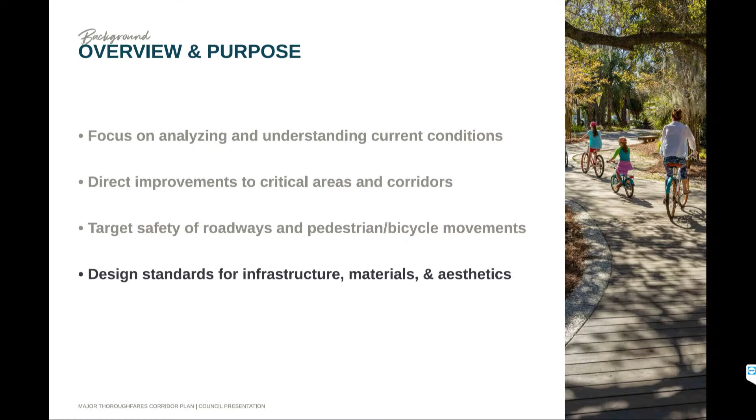We have started and ended all of this looking through the lens of safety. Serious injury and even fatalities happen within our public domain, and we need developed standards for infrastructure, materials, and aesthetics, and that is not to bake in monotony. It is actually meant to, from a technical standpoint, have a common understanding of state-of-the-art infrastructure and materials and geometries so that we can express the individuality of areas across the corridor over time.

This is a lot of public right-of-way and linear feet of trail and street. So I'll describe this in general terms as we get into this and understand exactly the confines of it. Again, we spoke to systems before. That's the technical aspects of what we apply to the corridors itself. Landscape and aesthetics, signage, branding, public art, roadways, intersections. Those are both cross intersections, slip lanes, and also roundabouts. Pathways for both pedestrians and bicyclists. And then transit. That transit will help us in a number of issues that we face as an island.

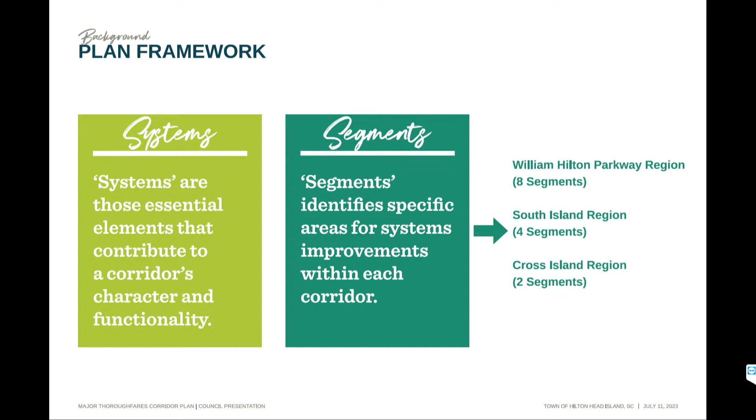Then to the segments, again, applying those systems to those segments. There are 8 different segments or reaches of the parkway itself. We've broken it down into geographic areas based largely on the feel of the corridors, the geometry of the corridors, the adjacent land use, the neighborhoods that are adjacent. The South Island region, there are 4 segments there as well. That includes Palmetto Bay, Sea Pines Circle, and Pope Avenue, and portions of Forest Beaches. And then the Cross Island region.

And then lastly, the implementation. To Sean's point, this is a very complex issue that leads to capital improvements. How do we take that down over time? What are the priorities? Where's the funding come from? How do we craft that in a capital improvement budget? All 3 of these sections, they're not chapters, they're sections, lead to this comprehensive document.

Again, as Sean had mentioned, we've got these wonderful, bright, world-class practitioners assisting us here. We've looked at the plans that you've done before. We've looked at national standards. We've looked at Smart Growth America and Vision Zero as guidance as well. We don't have the corner on the market on all the good ideas. There's a lot of good ideas out there, and we're taking advantage of them as possible. So we're learning from what others have done and what we've done on this island in the past.

As I mentioned, this is a lot of roadway and a lot of folks using it on a daily basis. We know there's a lot of people that inflow into our community on a daily basis, and less than half of that outflow. We've got 72 miles of public pathways. We've been at the forefront of a trail system nationally in years past. We need to augment that and get back to that point. And then the trolley, not to be discounted. We've done a lot with our trolley system, and our transit system does a lot of public good for not much resources and organization. They've done tremendous work. We think that's a diamond in the rough that can help in a lot of issues.

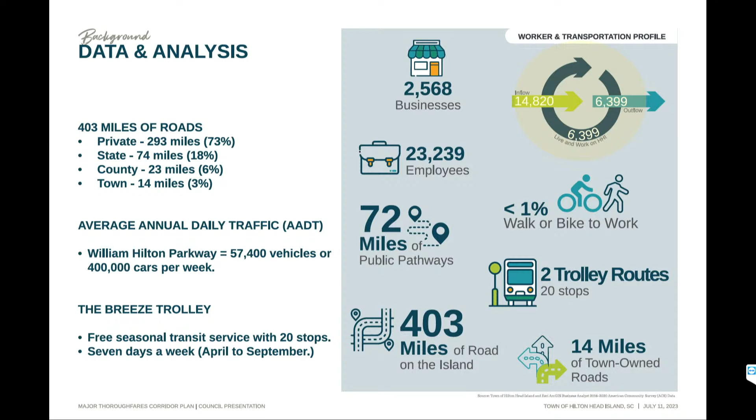Stakeholder involvement, the plan developments, neighborhood representatives, transit, public safety, utility folks, retail, and the major landowners have all been consulted and asked for their feelings and opinions. Quite frankly, they align with our intuition as we've approached this. We need to increase safety. We need to update the pathway system, fill in the blanks as it were, and improve the standards, functionality of intersections, create a consistent aesthetic that is not a monotonous aesthetic, that is a consistent quality of aesthetic that may be expressed differently, segment to segment, place to place. Develop a uniform signage and wayfinding system.

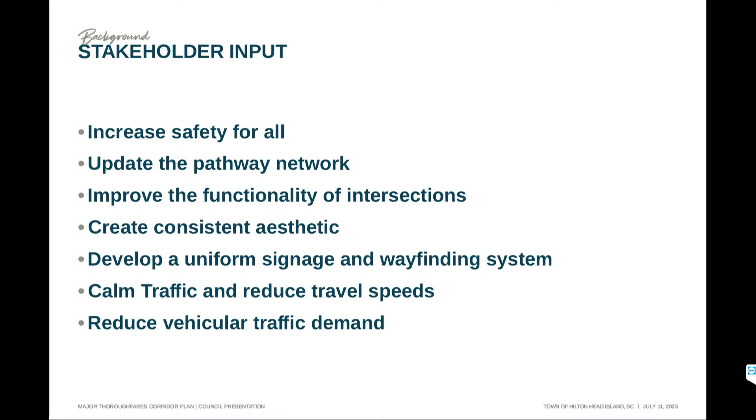So a highlight of the systems that you have seen before. Again, it's landscape, roadway, intersections, signage, transit, and pathways. That was probably too quick for you all, but in the compendium document, you'll see a lot of detail to all of that, where we're establishing minimum standards, directives as to what goes where, to be used as future design takes place into engineering and into capital improvements.

And Brian, if I can point out, we delivered council a presentation that had a little bit more detail to remind them of the system discussions that we had in March. For the purpose of this meeting, trying to advance into the segments and then recommendations, we condensed that down. So the presentation that you had previously provides more context on this. Happy to answer anybody's detailed questions about any of that today or latter parts. Don't mean to skate over that.

Okay, if we have questions as we go along, or how do you want to? Yeah, I think since it's so intensive, asking some of the questions as we get those certain highlights is appropriate. Mostly a comment or a question, and that is at the March 3 presentation, we had a document of about 113 pages, which included this part that you're summarizing now, systems. And now we have a document about 220 pages. My understanding is that we are to consider all of that together, totaling about 333 pages. So we don't set aside what you showed us before on systems. Remember that to the extent that we can.

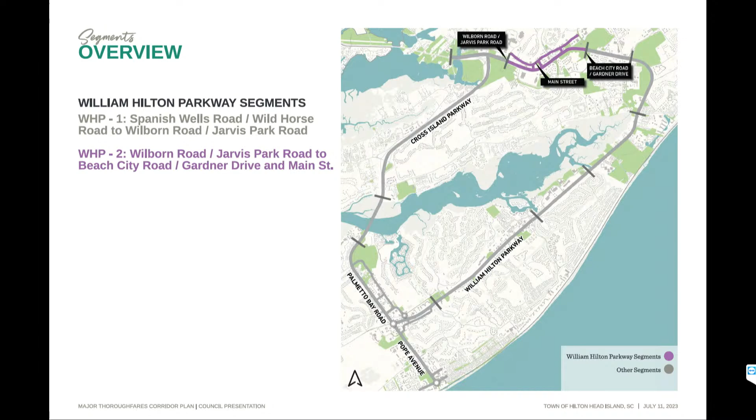Point well taken. Now to the segments. Again, these are the geographic reaches or breakdown of the larger geography, which is what I think is the backbone of our roadway skeleton. William Hilton Parkway, segment 1 is from Spanish Wells to Jarvis Park. Segment 2 is Wilborn to Beach City Road, including Main Street. 3 is Beach City Road to Dillon, essentially.

4 is through the Mid-Island, Dillon Road to Folly Field. 5 is Matthews, Folly Field down to Shelter Cove Lane. 6, the straightaway as I call it, the Shelter Cove Lane down to King Neptune. The second straightaway is King Neptune down to Shipyard and to Wexford. And then it's into the Wexford Drive to Sea Pines Circle. So we've broken that down into these geographic areas just largely to understand it. Each of the conditions within each of these geographies can vary for sure.

Right, right. If I could, you list these 1 through 6 or 7 here. Is that the priority you're giving them, or is that just geographic north to south? No, sir. It's not a priority at all. That's right, Councilman. It's a way of taking something large and breaking it down in incremental pieces so we can understand it intimately. A couple of those are in fact priority areas, just based on that previously shown heat map of the accidents and the fatalities. We need to address those safety issues as a first priority.

Thank you. One other comment, can you go back to that previous slide where you're showing the segments? I think it'd be helpful, and just a quick suggestion, to put numbers by those sections on the map. It helps to locate them when you're looking at them. I did it myself. Yes, ma'am. Duly noted. Thank you.

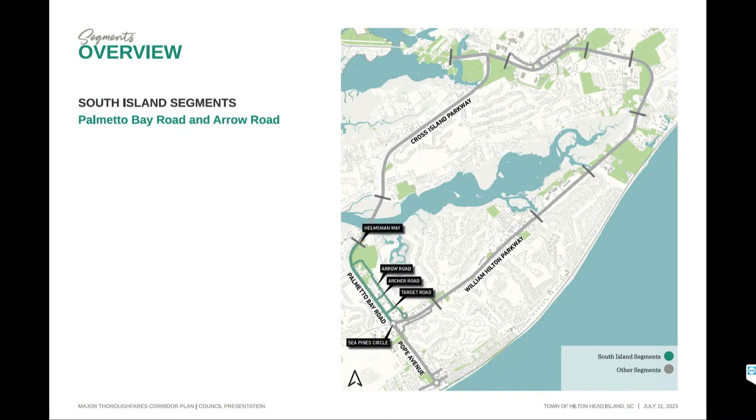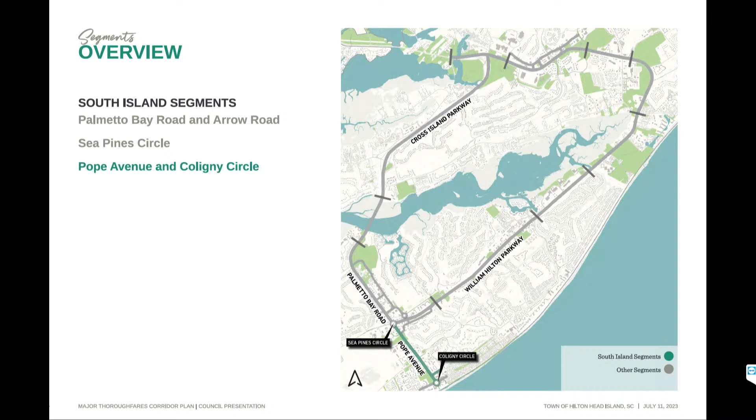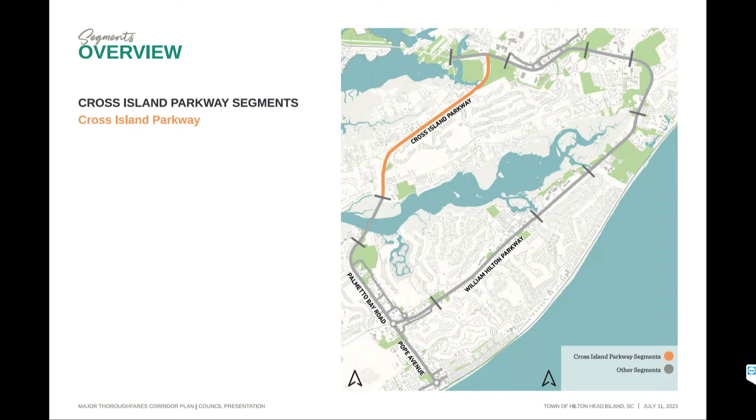Then the Cross Island Parkway. As we know, the toll booths have recently come down, and a repaved, modestly renovated corridor has been put in place. I think it looks marvelous. It performs very well. We need some bicycle and pedestrian access. So that is from the base of the bridge out to the 278, the Parkway. It also includes the Fraser Bridge itself and the approaches. As we know, there's some folks who use that bridge for pedestrian and bicycle activity.

So the prioritization of that, again, safety, connectivity. We've got to make sure that all modes of traffic can get to all places through this backbone, which leads to the skeleton of the public domain of the island. And then placemaking. Not all corridors are the same. Not all parts of the island are the same. We're always giving deference to the natural environment of the island, not just to protect it, but in fact, in many places to restore it and to enhance it, because it has been damaged and it is under stress, like any other natural environment that receives heat.

So the safety, go to those high crash areas and deal with them. New controls and configurations at intersections to make them safer. Access management, which means reducing those left turn motions out onto arterials. Turn lane improvements, improvements of unsignalized mid-block crossings, pedestrian crossings, and reduction of those conflict points. Connectivity is fill the gaps in the pathway. As wonderful as our pathway system is, it doesn't connect every place to every place. So we do need to fill in the blanks, as it were.

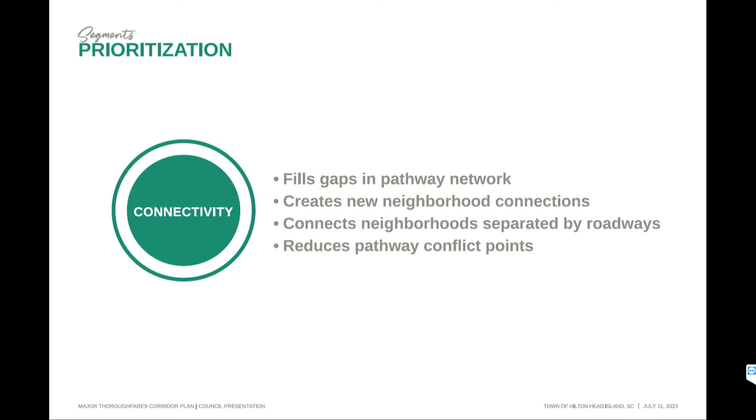We need to create new neighborhood connections, not just to the planned developments, but to the neighborhoods that are part of town, town jurisdiction. Connections to neighborhoods that are separated by roadways. How do we make those crossings safe so I can get from one side of my neighborhood to the other side of my neighborhood through safe means, and reduce those pathway conflicts. Placemaking, again, is always to improve the island character. Hilton Head Island is a very, very special place, culturally, historically, environmentally. How do we improve and advance that?

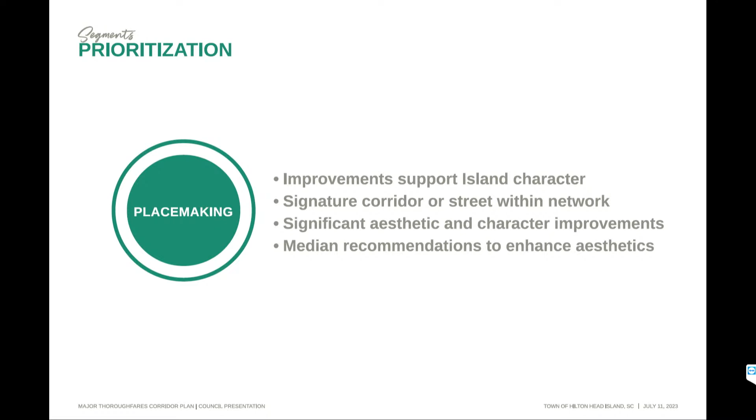So the prioritization, Councilman Stanford, to your point, we have prioritized the Parkway into 3 significant segments that need some improvements as a priority in our opinions. Palmetto Bay Road and Arrow, Sea Pines Circle, to be sure, and then Pope Avenue. Especially this time of year, as you know, Pope Avenue is a very busy corridor.

Sorry, can we go back to that slide and stop there for a moment for questions? So this is prioritization that the team has developed, and it might be helpful to revisit this after the council looks at all these segment improvements, because I have a few notes and questions about that prioritization, but I think it might be more helpful to talk about those as we go through. Yes, ma'am. This is all first blush, our recommendations, sans your input. We look forward to having your input again today.

And Brian, if you don't mind, I'm going to jump in for a second. The term priority segments here is probably not accurate. These are segments that council asked us to study in detail, and to make sure that we brought these forward for discussion. It's up to town council ultimately to tell us what the priority segments are. But we've evaluated these in detail and have recommendations that we'll cover here shortly. Some are recommendations that are sort of a single treatment application of the systems, and then some have options that we would ask for some input on. But yeah, I want to make that clarification. These are first areas asked to really take a deep dive into, and that's what we've done.

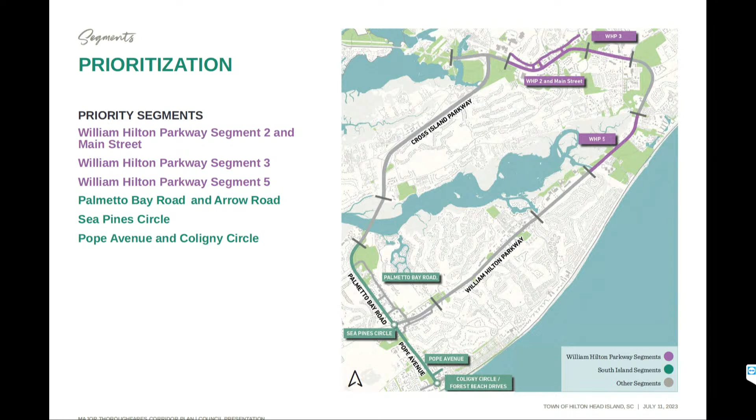Can I just add one thing about prioritization before we jump away from that slide? We did do a ranking system of all of the improvements made. And in the larger document, you'll have that in there as a reference. And these are the segments that had the most benefit with the implementations. So that is how these 6 or so were developed. Not my personal.

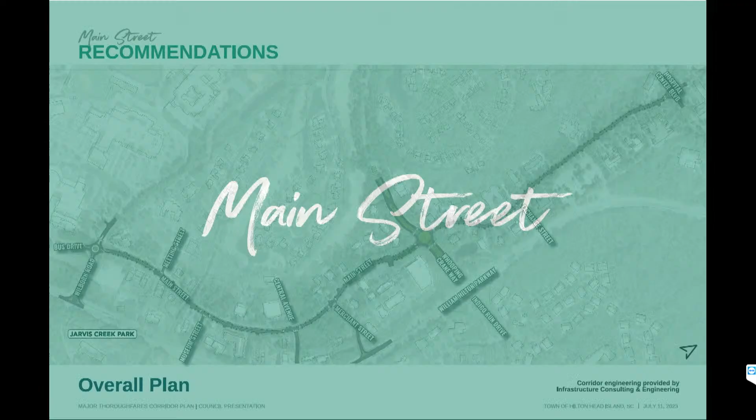Main Street is part and parcel of this. And design is happening on this Main Street portion itself, public and private. We'll go through some segments there. Again, we've broken this down into incremental pieces and show cross sections of what that would look like. Providing intentional pathways on both sides of the street, a pedestrian buffer from the vehicular way, putting bike lanes on the street itself. We've got a video we're about to show you that expresses this in 3 dimensions. I personally don't read sections well, but 3-dimensional images I do. This in many cases requires some easement to be taken outside of the right-of-way.

Next segment going to Whooping Crane is a wider concrete sidewalk and lives again partially within, and bicyclists largely on the street, or dare I say the commercial area of Main Street. So more sidewalk, more multi-use of the sidewalk is important.

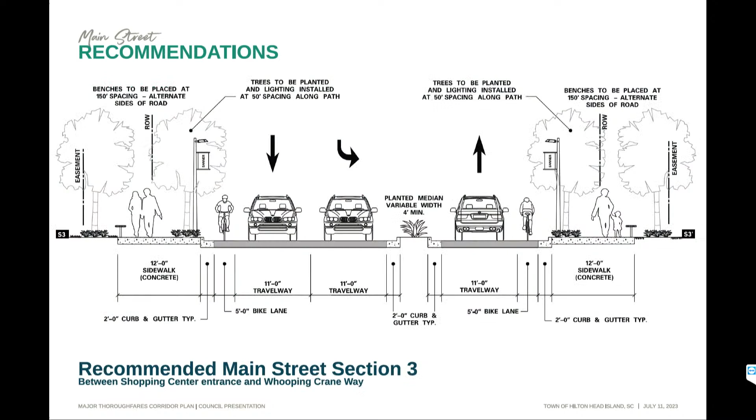Moving to the south of Whooping Crane, another section showing the modest median planted, 2 lanes of traffic in one direction, bicyclists, and again, sidewalk. Circle itself, we're recommending we place a circle at Wilborn and Main Street. That is a disjointed intersection, as many of us know that go through that, but that continuous movement that a roundabout would provide us is going to help a lot with that efficiency. Solve some of the offset geometry of the roadway system, which is a conflict point right now.

Brian, I don't understand the recommendation of 8-foot pathway and at the same time a recommendation of 12-foot pathway. What's being recommended? Joan, can you address that? So where the 12-foot is recommended, that's in the slightly denser adjacent commercial district. So the thought is that would provide a little more flexibility for on-sidewalk events or things to happen in there. And then essentially it's an 8-foot clear pathway. And in this case, we have trees and plantings that happen on a regular spacing that interrupt that 12-foot zone. Separate spaces along the road, it'll be different widths. Yep. All right, thank you.

In comparison, the existing fairly new sidewalk along Pope Avenue, what's the width of that? Down by Low Country Celebration Park. Pope Avenue? It's between 10 and 12 feet. I'm not sure exactly which one you're talking about, but it's wider, 10 or 12 feet. Right in front of Low Country Celebration. Yeah, it's probably closer to 12 feet in that section. And it's wide across the street, in front of the Marriott, I think that might be. On the other side. Yeah, that helps, the visual of that where we have existing. We have a lot of different widths on our pathways. Okay.

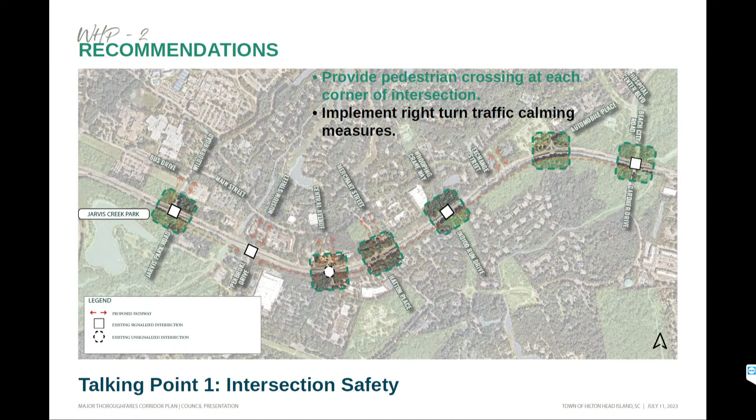Yeah, I think as they walk through each one of those slides, talking point 1, intersection safety, they talked about having the 4 corners, that consistent treatment with crosswalks. Talking point 2 about pathways and crossings, to have that consistent treatment, to add the missing segments of pathways that exist in that segment, and then mid-block crossings, talk about removing mid-block crossings, and we'll talk about some other spots where a different treatment for signalized mid-block crossings might be appropriate. So I think that was what we're trying to cover at a high level, to say, here's what are the recommendations within that segment.

So the four corner treatment, where it's all the same, that goes back to the systems of what it looked like. So I got that. But where you're taking out or adding mid-block crossings, I think it's important to point those out in each of these segments. So looking at WHP 2, where is the mid-block crossing being eliminated? Councilwoman, it's on the slide here. That's the mid-block crossing at Central Avenue. Thank you. At Central Avenue?

Just make a comment and maybe a suggestion. This is the first time we're seeing this and able to hear the explanation of what it is we're seeing. Mayor, you made a suggestion about our notes that we submit back. I think it's important for us to listen carefully, take it all in, but there's obviously homework to do, to combine the two reports, to come up with more points. Right now, they're gut reactions.

And I think to be more specific and helpful along the line for our next meeting, we take what we gather today, do our homework, and send notes, have another meeting, so that it can be far more specific as to each one of the elements. And I don't know if that makes sense to anyone. That's what I plan to do.

That makes complete sense. And this is a major document undertaking that requires not only a lot of conversation amongst ourselves and the community, but with our other partners, with the PSDs, to make certain that it's meeting the needs. And there's a lot of understanding that still needs to take place. So definitely we need to take our notes and submit them. Alex, I know you had a comment. That's okay. I'm making a note and I will send it in.

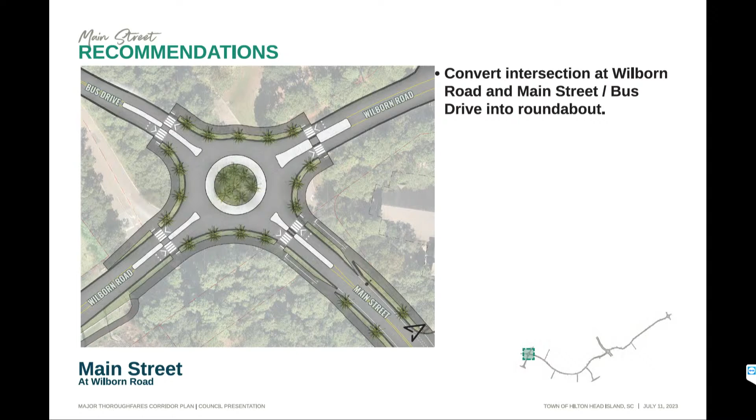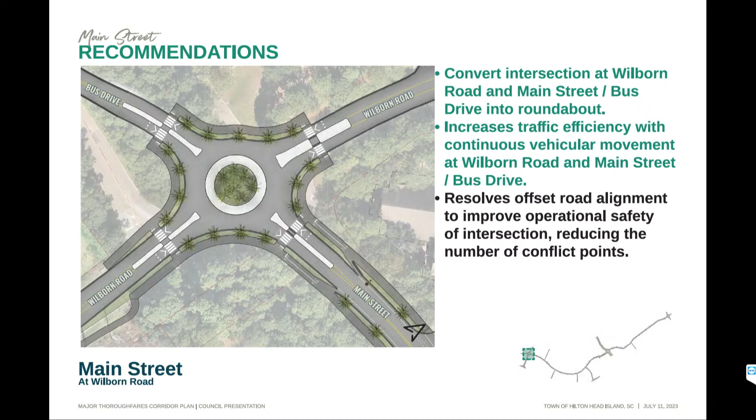Again, medians have been planted. We've allowed for more pedestrian and bicycle areas, converting this intersection into a roundabout, again, to increase that traffic efficiency and resolve what has been pretty troublesome offset geometry. I know staff has struggled with this intersection for years from a traffic movement standpoint. So this roundabout satisfies a lot of issues, that roadway geometry and minimizing those conflict points.

So these are applying the streetscape standards, various intersections, crosswalks, and queuing spaces on the walkways leading to those crosswalks. So the same standards we're using elsewhere are being applied here. Whooping Crane traffic circle, providing for pedestrian crossing at the four legs. Same with this roundabout at Hospital Center.

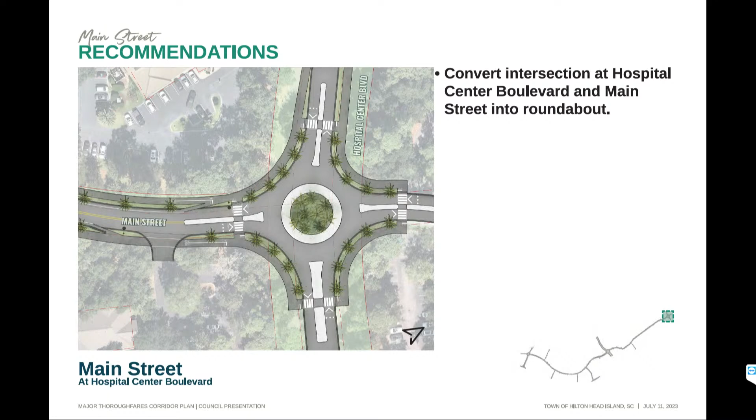Tony, or Kim, I'll ask you to maybe get up that video if you would, please. Just 4.5 minutes long, but it's traveling westbound toward Wilborn.

Volume. Is there supposed to be volume? There is no volume. Okay. No, no elevator music. Mhm. It is intentionally sped up for the nature of the viewing. Sure it is, Tony. Sure it is.

So there's the proposed condition laid over the existing roadway. 11-foot travel lanes, bike lanes on the street, 5-foot wide bike lanes, and buffer, landscape buffer, and then path.

I hear music. Thank you. I thought it was just me. I think that's someone's cell phone that's adding music.

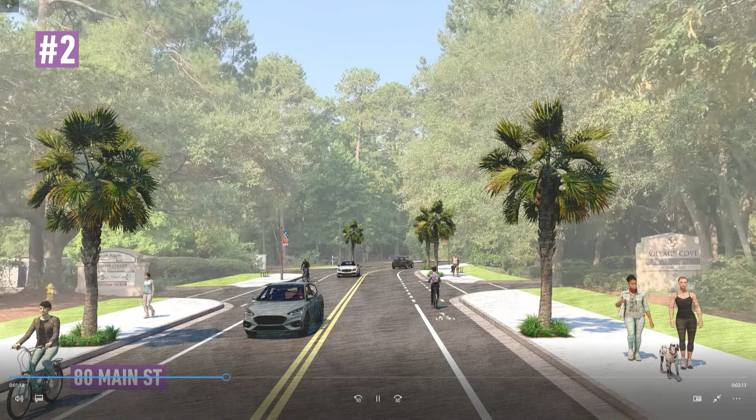So, Councilor Stanford, you can see here where we've got that widened pathway, but we've got the planters that are curbside. Those again, as final design happens, may be increased or diminished, but it gives you a sense of the pedestrian environment. No medians in this section.

Does this require acquisition of more right of way? In some places, it'll require acquisition of at least easements. Taking the median in some of these instances and putting it into the pedestrian environment causes us to push out. This is at Whooping Crane Circle. In some places, you'll see we've pushed in, so the median has gotten diminished or removed in places to accommodate sidewalks on the outside, so that we are impacting those adjacent properties less by sacrificing some of that median space.

I'm hoping those trees, though we haven't worked from a survey, haven't worked on this to that degree, can be identified and we can adjust as need be to save significant trees. Could be any number of things. And that planter may be something that's elongated. That could even be a tree lawn, not just a planter.

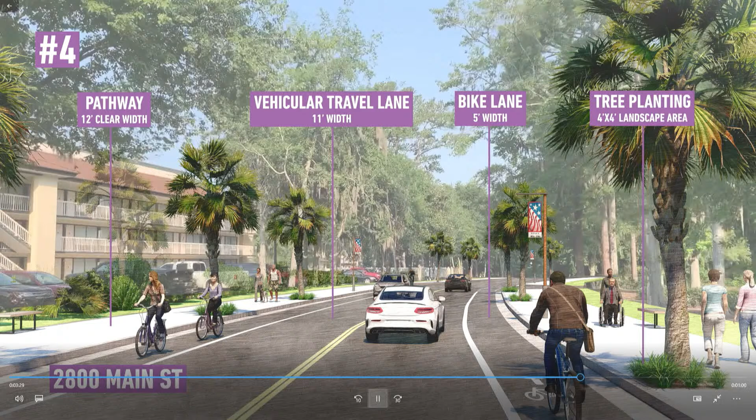I think as I understand it, from looking at a lot of bike lanes in a lot of different locations, is that there's two kinds of cyclists, if you will, those who would be on the pathways that are recreational cyclists, and those who are probably going in a bike lane because they're traveling to and from home or to and from work, and I have seen a lot of people try to ride their bike along this road, including me, to get from one place to another.

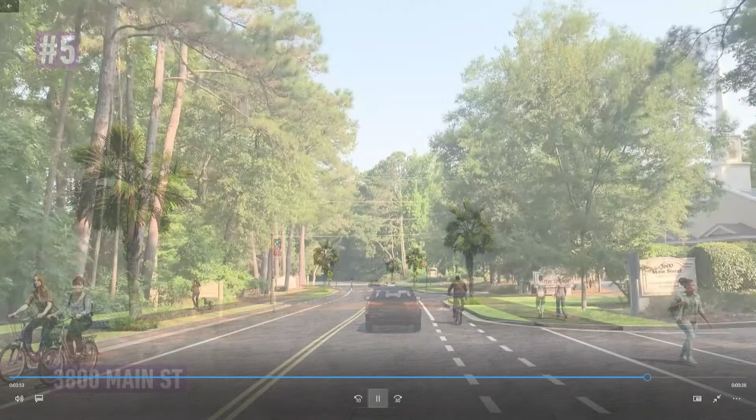So I think, as best I understand it, widening the sidewalks to 12 feet can accommodate those recreational kind of cyclists, the sometimes cyclists, and adding the bike lane adds that availability for those who are commuting for work or something else like that. Or if I want to go get my nails done, that was our last stop on the video there.

I hear you and understand that. Well, it's just there's not going to be any, that would be a discretion, right, as to where you choose to ride your bike. I'll stand by what I said. Video is very helpful to see. Segments coming alive helps a lot. I agree. Thank you. All those comments are duly noted. Yes, Alex. I appreciate the video as well.

When we come back again, I would be interested in the treatments on William Hilton Parkway as well, particularly with the new circle at Wilborn and Bus Drive. There's a good amount of stacking that happens on William Hilton Parkway certain times of the day in that area. I'm assuming that will probably increase with the circle being there. So I'm just interested in how that looks.

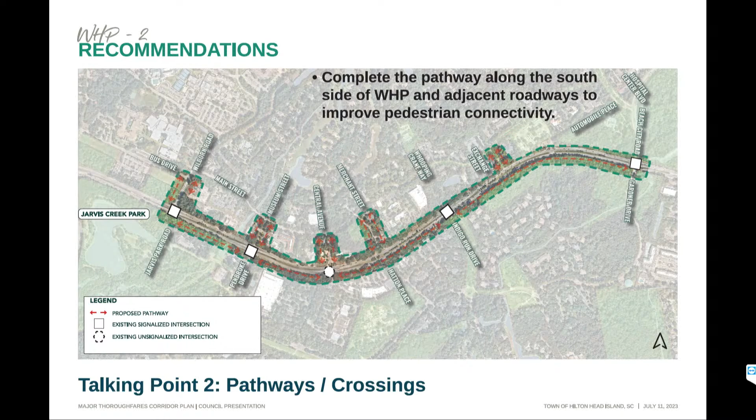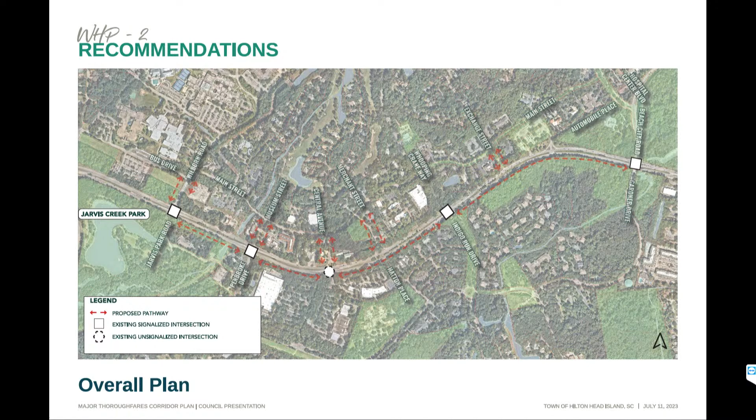I don't know if we have a zoom in on that, Sean, but we did have a slide that was added for this presentation today that has the Whooping Crane circle that shows the connections into the existing pathway segment. It's a little forward when we get into Main Street plan. And then the red dotted lines show the connections into Hilton Head Plantation. It's this slide. Overall plan? Oh, I'm with you, Sean. Slide right here. Okay, thank you. I'll study it. Thank you. That was very important to us, showing that connection out, which was part of the impetus for acquiring Main Street from that bike ped mobility standpoint.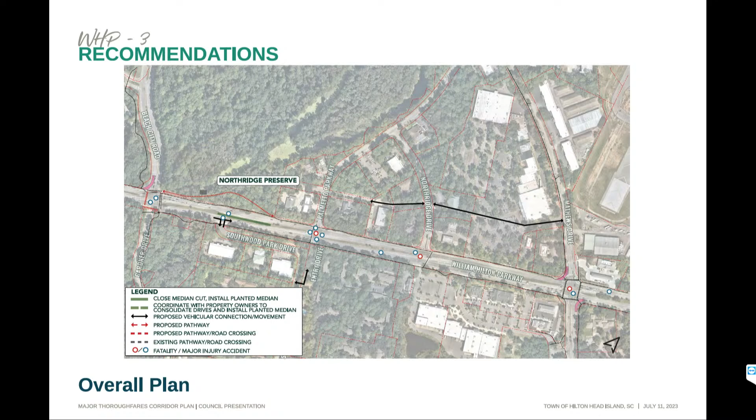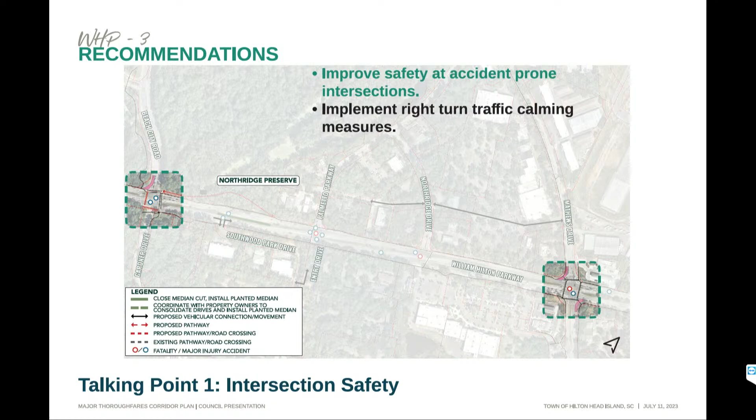In the Mid-Island District Plan, we spoke to this vehicular connection through now privately held properties to interconnect some of these roadway systems, the heavy black line. So that may look familiar to some of you. These are some of the accidents at the intersections of Mathews and also Beach City. And we're proposing that we fix some of those right turn motions to calm some traffic, pedestrian crossings at each of those corners at the Beach City intersection.

Eliminate the left turn, some of the left turn accident prone areas. Jonathan, I'm going to leave this to you to expand upon if you can. Sure, absolutely. As was brought up earlier, this is one of the worst corridors from a safety standpoint. Commissioner Brown brought that up. And this has the highest concentration of fatalities as well, as you can see up there in red.

One of the things that was brought up previously about eliminating the right turning treatments is something that SCDOT is doing throughout their entire state. Unfortunately, we have a very bad history of accidents and fatalities on our streets. Probably the worst in the United States is where we sit right now. Just here on 278 and SC 42, they just completed a project where they removed a free-flowing right turn or a partial yield movement onto 278. The reason for that was safety, pedestrians, cars.

There have been numerous studies funded by insurance companies documenting the viability and the need for these movements because they create a lot of congestion, a lot of safety concerns, and they are a bad treatment when you are blending pedestrians and bicycles with motor vehicles because drivers don't pay attention when they're turning right. And so that is one of the biggest safety things we can do at this section of the corridor is to remove those. Traffic will still flow. It'll be safer. And so that would be one of the first things we would want to recommend.

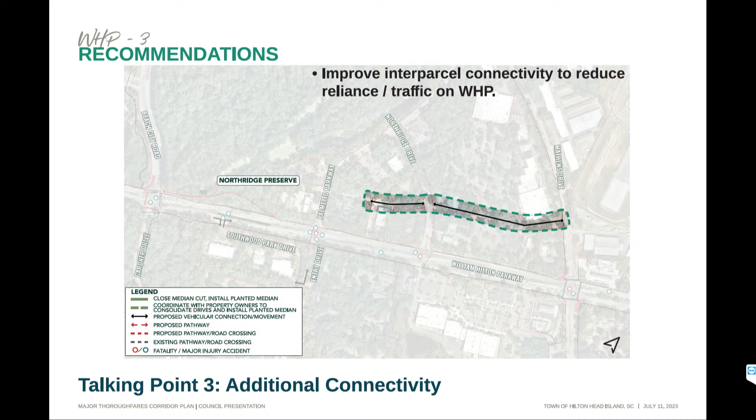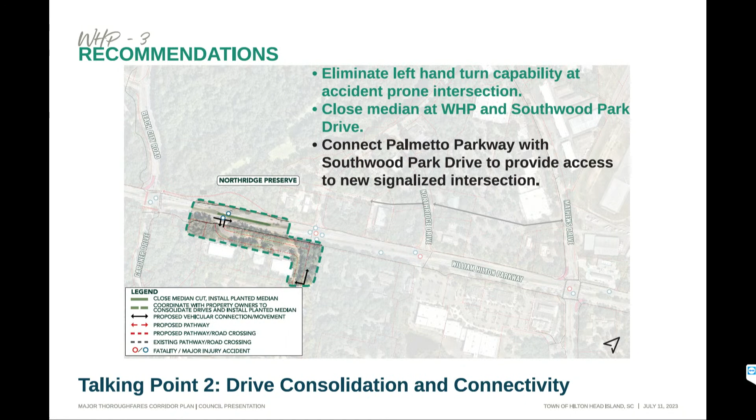Ed, Mr. Mayor? Yes. I appreciate we've looked at an option to put a back road in on the Northridge side. I'm just curious to know if there's been any consideration of doing the Oaks and Southwood side, kind of behind that business center back to Gardner Drive. Thank you, Gardner. Yeah. We did talk about that, yes. I don't think we have a graphic that shows that, but that is called out here. Let me get back to the right slide. It is called out here with connectivity on the north and south sides. So that would be something that would be important. Again, making those connections so that you can take out the left turn movements there.

One of the things that I noted in counting the dots where accidents, fatalities, and so forth happen, something like 4 out of 15 dots are between intersections. People who were injured were crossing in the middle of the block or jaywalking. Is there anything that can be done about that? Sure, I will tell you, yes, there are things that can be done to address that, and it's through channelization, providing the correct locations, providing the crosswalks and locations that make sense, and then that will cut down on individuals jaywalking.

Note that the crashes that are reported, sometimes they do fall outside of the fringe of that because they'll just code in a GPS location for that. So there is a little bit of variability of where those do fall. So some of those that may have shown outside the intersection, just because of how the data is coded with Department of Safety, may actually be closer to the intersection than what is shown based off the GPS coordinates. So there's some variability with that as well.

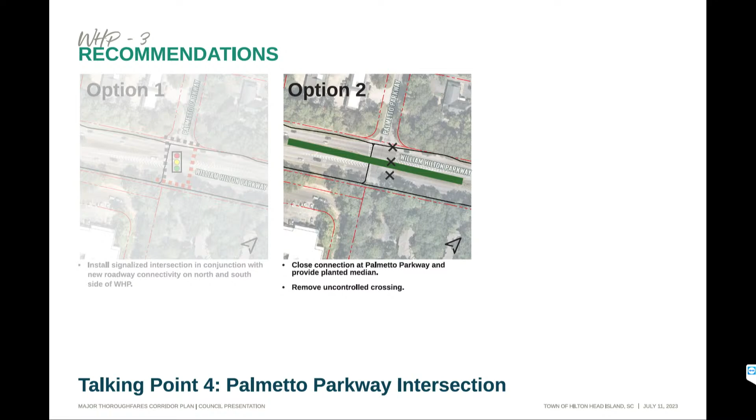Councilman, as you'll see in, I think, maybe the next slide, the barrier or the strip between vehicle travel and the trail is meant to be robustly planted for a whole number of reasons, not the least of which is environment, but certainly to diminish the desire to cross. Also, those medians are to be robustly planted as well. Now, somebody that wants to hop over a 4-foot tall shrub mass and go between trees, if they want to jaywalk bad enough, they probably will. But the casual bicyclist or the pedestrian that wants to stray off and dart across the street, we can fix that with that streetscape without putting up guardrail and concrete barriers and things that we don't want to see.

Had so many pedestrian accidents there, that's what I'm thinking about. But Councilman Ames is exactly right. This is the Mid-Island District, and this will have a special character, and this is intentionally where we want people to slow down and take advantage of what is village center type development. Also, to Councilman Ames' comments, this conversation has been going on for quite some time, but we're just months away from having smart signal technology through this corridor that is going to help with vehicle movement efficiency as well. So that wasn't in the conversation 10 years ago.

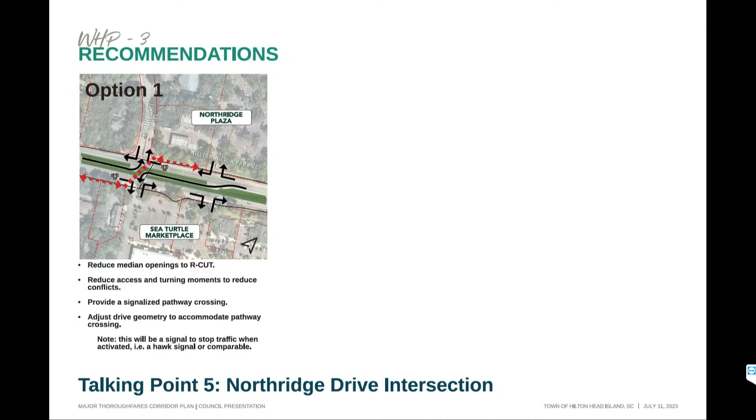So if you're headed outbound off the island, it doesn't necessarily have to stop traffic, because if the left turn is not needed on the Northridge, you don't need to call it, but you can call the left into Sea Turtle Marketplace. So it gives you a whole lot more optimization features than a normal signalized intersection. Plus it allows pedestrians to cross. There would be a median in the middle that they would use. And again, we're crossing at a signalized location.

Oh, yeah. The other thing to say is that if you're riding your bike along the pathway on the Northridge side of that road, there's so many ways for traffic to come at you. I don't like to bike along there, I can just tell you that. So that would also reduce the volume of turning traffic, the direction of turning traffic along that multi-use pathway on that side of 278. Correct. If we get into the weeds on this, we're gonna need to see some animations. It's hard to visualize your images here.

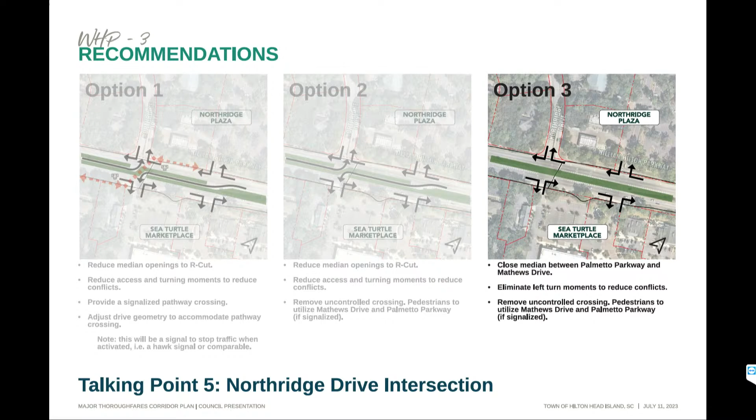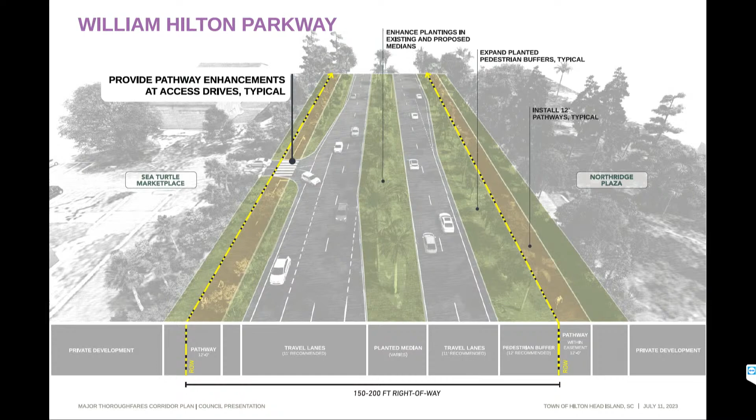Provide some crossing enhancements to Councilwoman's points about the bicycle crossings at curb cuts. The less of those we have, the better. The better they are marked when they have to happen, the better. Again, applying our systems to those crossings. So taken as a whole, that becomes much more parkway-like, much more green, lots of separation as much as we can provide between modes of travel, and where we do have to have crossings, we do that in a safe fashion. So again, this is a concept.

Does SCDOT have 150-foot right-of-way or 200-foot right-of-way? Do you recall, Jonathan? In other words, are we going to have to expand the current right-of-way to accommodate what you're proposing? Yes, we've got some of this we're suggesting. It varies. I think the short answer is it varies. And is this going to need to be applied lockstep in every segment down the parkway?

Likely not. But as it gets into preliminary engineering, will we be in some places getting into easement conditions outside of the right-of-way? Likely. Is it going to be our goal to stay within the right-of-way? Certainly. And in a lot of these places today, a lot of these pathways are also already in easements. So it's kind of continuing the existing tradition of that. But we certainly want this to be the safest condition possible. And if that's taken a few more feet in an easement, that I think is a worthy undertaking.

The other item that popped into my head when you just said the parkway, I know I'm making a distinction between what's going through here and parkway. Yeah, and to your earlier point, this being the mid-island section and that which is likely, hopefully going to redevelop in a more mixed-use fashion, this, dare I say, becomes the downtown district for the island over time. And I think this roadway character needs to change and reflect that.

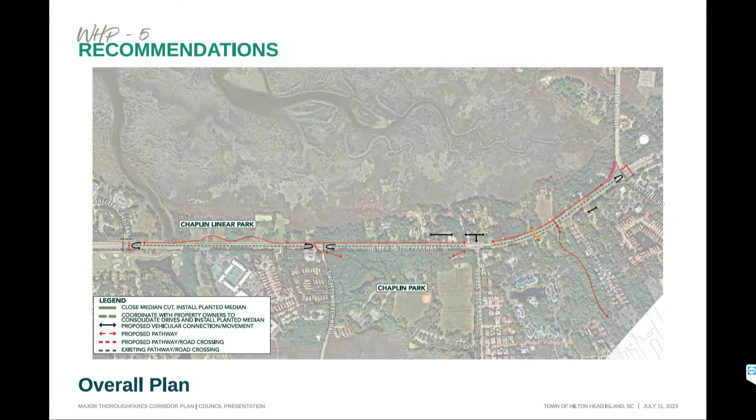So now on to Parkway segment 5, which is through the Chaplin neighborhood and park area. I'm going to let Jonathan speak to all of these, quite frankly. Starting at Mathews Drive, the hypotenuse around connecting Mathews to William Hilton as we come around. I referred to this earlier as the beginning of the speedway.

This is one of those locations where we start to see traffic speeds pick up as you come around from the mid-island part of it, because you don't have a lot of friction. Friction meaning intersections, driveways, other things like that. People feel like they can drive at a higher speed. That's exactly what they do as they approach the Shelter Cove area. And so if you are a visitor who's coming in here and you're connecting up to William Hilton to head into other locations, key crossings are going to be important. I won't belabor this point again, but the free-flowing movement from Mathews onto William Hilton, again, major safety concern.

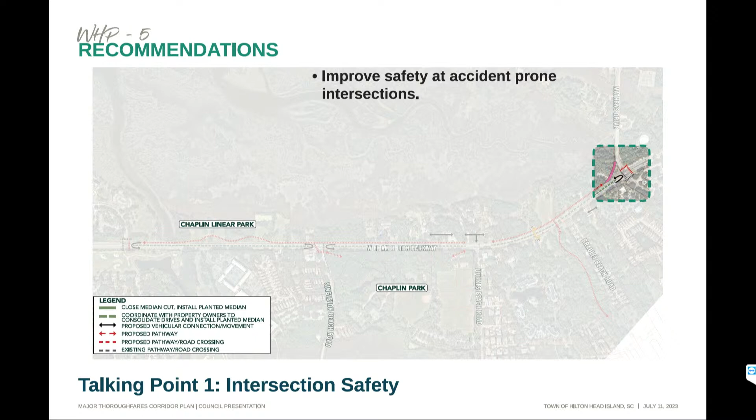I'm just curious. I'm going to date myself here a little bit. That intersection, Mathews Drive on 278, once upon a time had a yield sign where traffic quite often would come to a stop before entering 278. I guess my question is, I'm not opposed to your suggestion, but what's changed as far as SCDOT's appetite to go back to that break versus what they recommended before, which was to have it free flowing?

I think a couple of things have changed. The volume has increased to a point where there's more conflict between vehicles because you've got a higher density of vehicles now on 278 than when that was implemented. And so for vehicles coming off Mathews, the acceptable gap to merge into has decreased. And because that's decreased, you can't easily maneuver into that. There's places where this still would work, not necessarily on the island, because I don't think it's within the right context, but elsewhere in the state these would still work.

Here, you need to be focused on reducing that conflict and standardizing the design so that you don't have free-flowing movements. Again, it's sending a mixed message for drivers. This tells me, okay, I'm entering into a roadway where I need to get up to speed quickly, because I'm going to merge into this because it looks like an acceleration lane, versus what we're just talking about of trying to reduce speeds to make it safer for vehicles. So it's communicating the wrong message to a driver just subconsciously by the design.

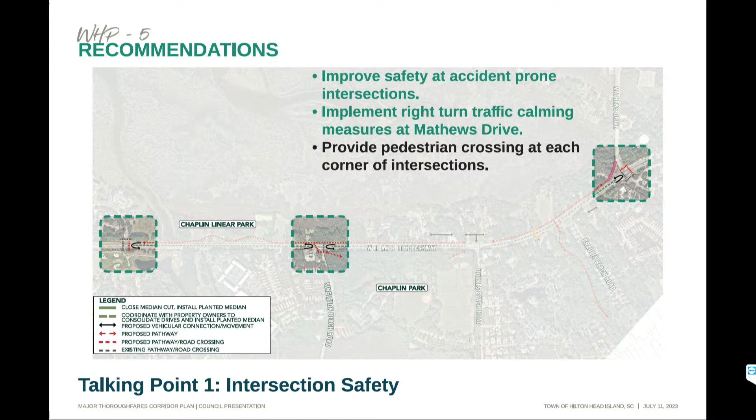Look at locations where, again, we mentioned this throughout, but Mathews Drive, implementing that. Accident-prone intersections, what can we do at those locations to offset crashes that are there? Singleton Beach Road is another location with crashes. Provide pedestrian crossings at each corner of the intersections. That's going to be key. Anytime we can standardize that, so it's not just a single crossing but we've got it on all four corners, that's going to be important as we continue to move forward relative to safety.

Work with our property owners to consolidate driveways. There's a couple places through here, we've highlighted several of those, where it's a lot of just open cuts. And from a driver's perspective, but also from a pedestrian's perspective and on a bicycle, you don't know where a car is going to come out. So channelizing that, standardizing that, making it look more uniform, it's going to reduce your conflict points, it's going to make it safer, and then put in locations where you need to control those movements, improving the aesthetics through the medians. That's going to help with reduction of movements there as well.

And then an updated roadway section. We talked about this previously in the Mid-Island section, but really establishing this as a gateway is going to be key, having that vision. This is a section where I feel like it does not have the character that it needs to for a corridor that's called a parkway. Right, that's a pretty simple explanation.

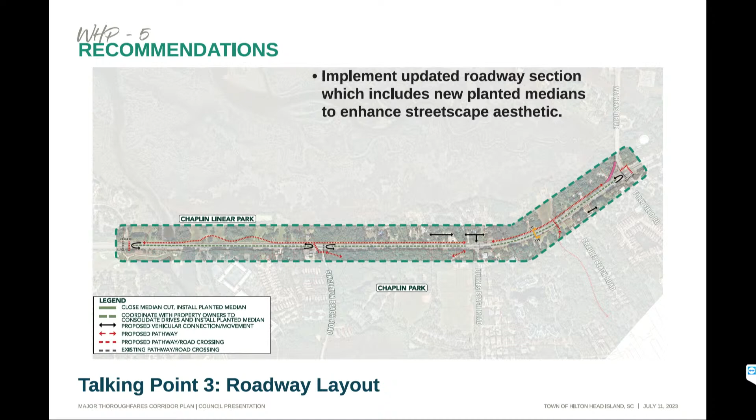And so that's going to help with making bicyclists and your pedestrians feel more safe, because they are going to have the perspective that it's dealing with 2 lanes instead of 5 lanes through there. Speeds are going to change because it's going to feel tighter for the drivers. It's going to feel much more luxurious for the pedestrians and bicyclists because it's going to feel like a smaller, more intimate setting rather than I'm out here on a highway. And those things are going to translate down and affect behavior of those drivers. So those are some key things that we need to be looking at.

One of the hot buttons that I've got in that section is that your pathways are immediately adjacent to the roadway. And so providing this buffering would be a big safety enhancement. Yeah, Councilman, they're right behind the curb. They're almost unusable. They're so, dare I say, scary.

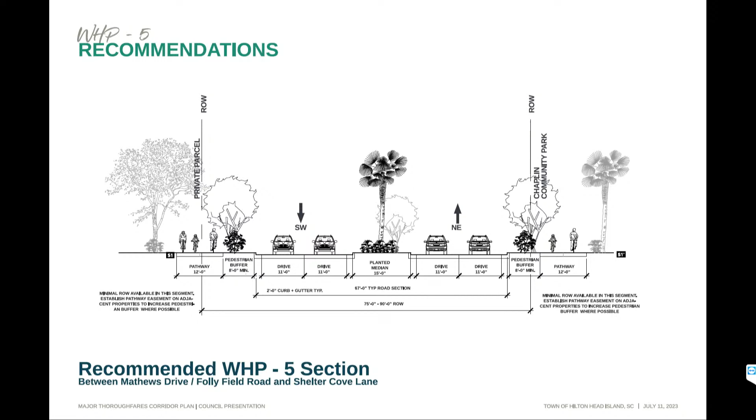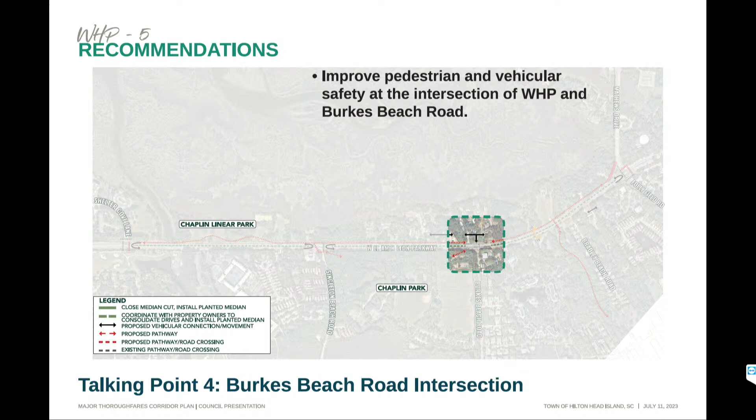Let's talk about a couple key locations that we want to jump into for recommendations. We started talking up there at Mathews already. Let's jump into some other options and other locations here. Let's talk about Burkes Beach intersection here. Like with all of these, it's about improving the pedestrian and vehicular safety at the intersection. This was a location that did have some crash history, so we want to make sure we address that. What are we talking about relative to that?

Well, one option here is to signalize the intersection. Again, go back to what I said earlier, for pedestrians as well as even for vehicles, from the standpoint of controlling what drivers are going to do. A traffic signal is going to do that. You still have conflict points with the signal, but that's going to help with that.

Designing the intersection so that with the implementation of the median, it has the provision for passenger car U-turning movements. I'm not talking about tractor trailers or WB67s, but if a resident came out of their driveway, they would have the ability to come down and U-turn at a signal, which could be controlled by the signal, so it makes it safer for them to do that. It also works in coordination with pedestrian crossings.

Another option at this location would be to not put in a signal and convert this to an R-CUT, right? That's going to take out your exiting lefts. You've got the opportunity because of connectivity to go down to the mid-block crossing near Bradley Beach Road. We can look at options with this. This just takes out the movements that are unsafe. This could also be signalized at some point in the future if the left turning movements got so heavy that they couldn't find a gap. So it gives you two different perspectives.

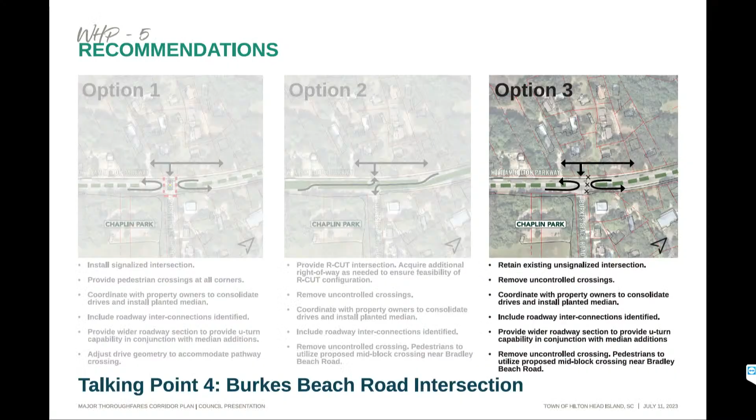Let's talk about, yeah, pathways. Pathways across. I can do it. Yeah, go for it. Okay, sure. So looking at locations, this was, again, if no pedestrian crossings are provided here, provide a mid-block crossing down at Bradley Beach to access the Drissen Beach Park and Bradley Beach.

So as we work through this, kind of getting back to what the mayor was saying, a lot of things are going to adjust as you get into the feasibility of this and you implement, you get into the details, right? So how the driveways are connected, where are the access locations, where are the pathways, what's the offset of that, where does it make the most sense? We know that there needs to be some sort of crosswalk through here as we design this and get into the details, then that will come out and continue to move.

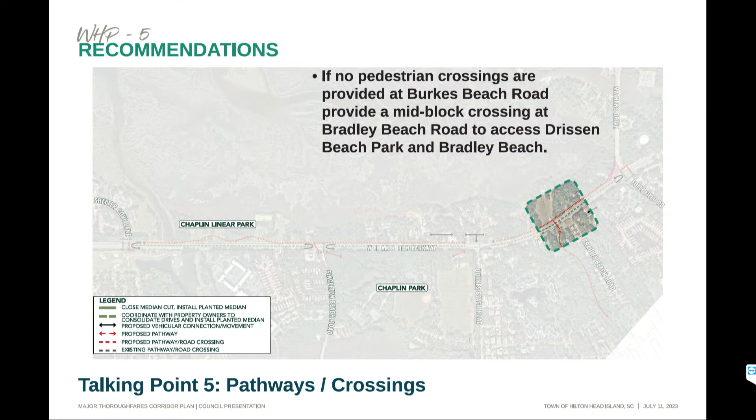I think just to build on that, is just thinking again holistically, like when we close that, where does that push other folks crossing, and does that negatively impact those crossings and how that movement works through in those spaces? That is something to consider when thinking about it holistically. Route modifying.

Understanding that, and I don't know whether or not there has been crossings in that area, but it would be interesting to know what that looks like, because anecdotally, again, there's not a lot of activity.

Mayor, may I just make a quick point? We all see that big old clock ticking on the wall. It's a matter of how long you're willing to participate. We still have Palmetto Bay Road. Yes. What else? And Pope Avenue, what else? Pope and Sea Pines Circle. They'll have about 3 elements and then some next steps.

Are we trying to get out of here by 12, 12:30, or 1? I'm canceling my haircut right now for 12:30. I'm here to work, Mark, so whatever it is, it's fine with me. Okay, well, let's try to get out of here by 1:45. I don't want to hurry you, but if we don't get to everything, we know we're coming back. So this is great feedback today. I just know I could use a quick personal break. As was just whispered in my ear, right now might be a good time for a 5-minute break.

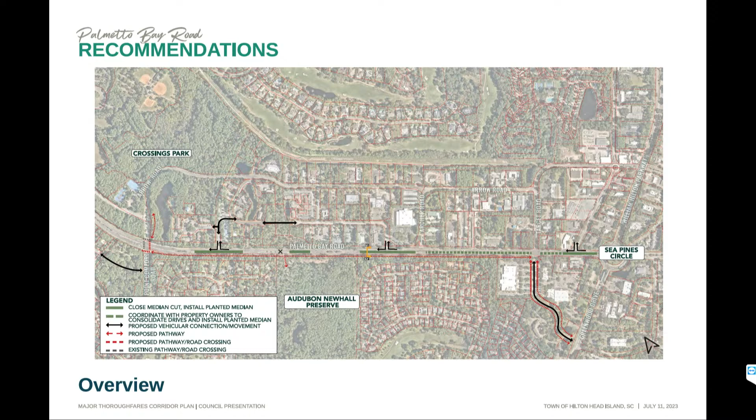Recommendations here are some access management to create the fourth leg of a Sea Pines Circle bypass, as I casually call it, and provide for some pedestrian access. Point by point is first that Greenwood Drive, creating a new Greenwood Drive connection to Palmetto Bay. This would be through some of the Sea Pines property closer to Greenwood, and also through the Island Crossing to a cross intersection at Target Road. So we'll talk about it when we get to Sea Pines Circle in a moment.

The other three quadrants of Sea Pines Circle have these dedicated roadway bypasses, if you will, that I think help tremendously on the traffic volumes at Sea Pines. This would be finishing off that fourth corner.

Secondly, would be to consolidate some driveways and manage access for those left turn motions, as we've talked about in other segments, with the introduction of landscaped medians along Palmetto Bay. Reduce those conflict points and closing up the medians to the extent possible, still providing for access to the businesses along that stretch.

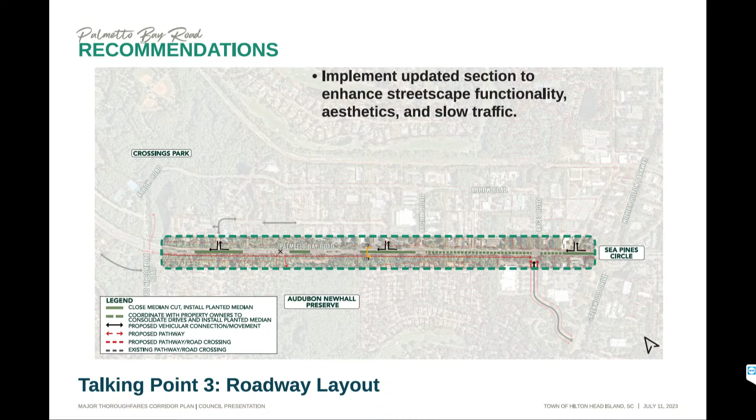Jonathan, there's been dialogue with Sea Pines folks. That's correct. I met with the neighborhood and with staff collectively all together to talk about that, and then with support for that connection, which we'll get into the details of why that's important and how it works to benefit that community as we get more focused on Sea Pines. But yeah, there seems to be at least preliminary support for that. And Island Crossing, the private property owner, have they been contacted? That's my understanding, yes.

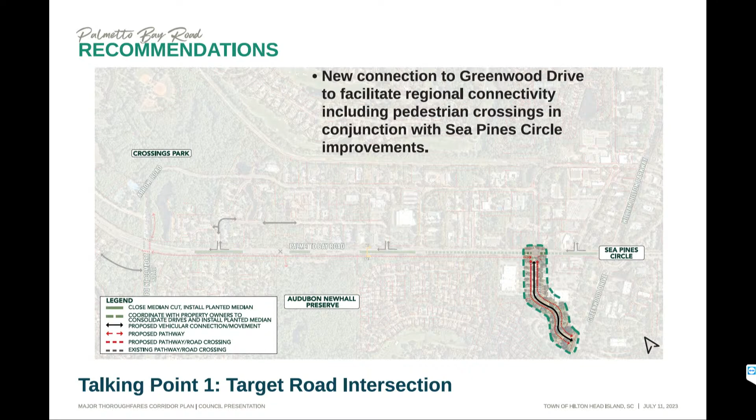Thank you for that comment. I think Palmetto Bay is one of our most significant opportunities to make a statement about living on Hilton Head Island and coming here and enjoying the place. So I think this is a big one for us. Just to add one brief thing, we've talked a lot about context today, especially as it relates to mobility. As you're coming down off the bridge, this is that transitional zone as you're approaching Sea Pines. And so the design is going to be really important. Setting the tone contextually and aesthetically is going to be important, which I know we're going to detail out, but you really have a wonderful opportunity here. And that will affect speeds as well.

I would add a perspective of my constituents, and that is the reduction of speed takes place after the traffic light and goes right by Bay Pines and the dangerous intersections through that area. So to the degree that you can start introducing some speed reduction before the bridge would greatly enhance safety on the downhill side. Correct.

Those supporting roads of Arrow and Archer and Target as well have an impact on traffic movements. We're suggesting in this diagram that we've got proposed pathway connections along all of those. We're also proposing a roundabout at Target and Arrow that's been talked about before. That's got some tortured geometry and has for a long time. Also an opportunity for an all-way stop at Archer and Arrow Road to slow traffic and allow for crossings. So that's what the yellow dot and the yellow pentagon is all about.

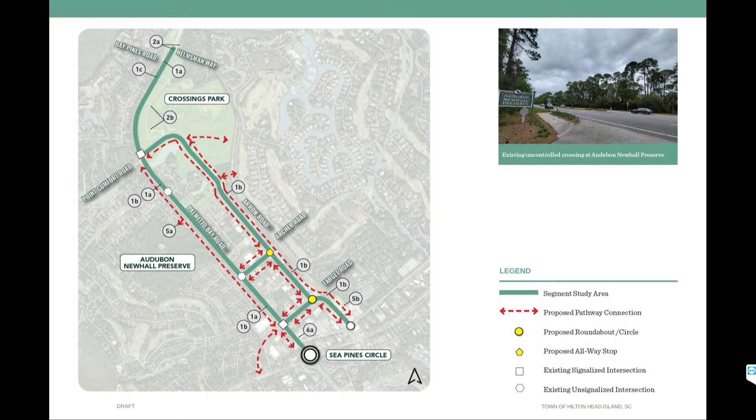This section of Archer, again, requires some roadside drainage work as part of that roadway. As we all know, there's open ditch drainage, but pathways on both sides with a buffer contained within the right-of-way. There may be landscape easements that would be wise to encourage outside of the pathway, but separating the roadway from those pathways. I've experienced a lot of bicyclists on the road because there's no other accommodation there. And we have a trail to the north of Arrow Road, but not everybody knows it or uses it because it's more convenient just to ride your bike down the street.

John, is this town-owned property and is it 60-foot right-of-way at this time? We own a portion of Arrow Road, not all of Arrow Road. What you see on this section or profile is to accommodate the treatment within the right-of-way that exists. Thank you. And are you saying that there's a way that we can keep the bicyclists off of the road in a section like this? Yeah, to Sean's point, there may be some right-of-way needs, some easement needs, but there is some existing right-of-way there that we could accommodate.

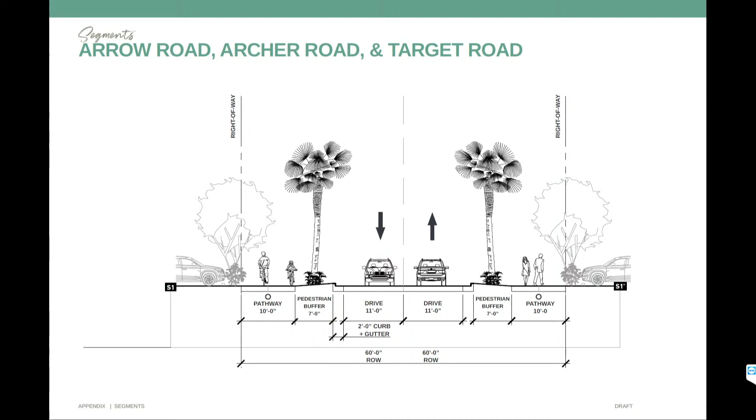So that recommendation is to provide for, my machine just went crazy. Install pathways on the south side. This is back to Palmetto Bay, is to provide for that pedestrian and bicycle trail on the south side.

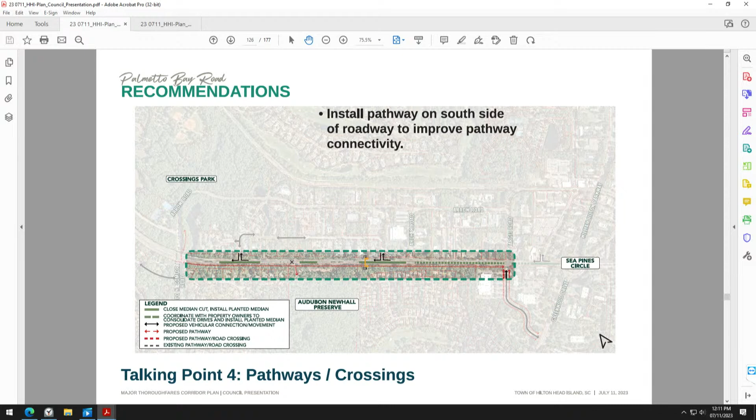We got a mid-block crossing at Newhall at the Audubon Center as well, to remove and to add along, to the councilman's point, a median that restricts those movements into Bay Pines Drive as you come down off of the bridge towards Sea Pines Circle to improve safety at that area, eliminate that left turn motion that requires a connector off of Point Comfort Road as well. So all of those home sites have got more direct access to Palmetto Bay.

That would be converting that existing private drive to a public street and making that connection for Bay Pines Drive down to Point Comfort, which is reflected with the black arrow. That's a high priority for the residents of Bay Pines. Thank you.

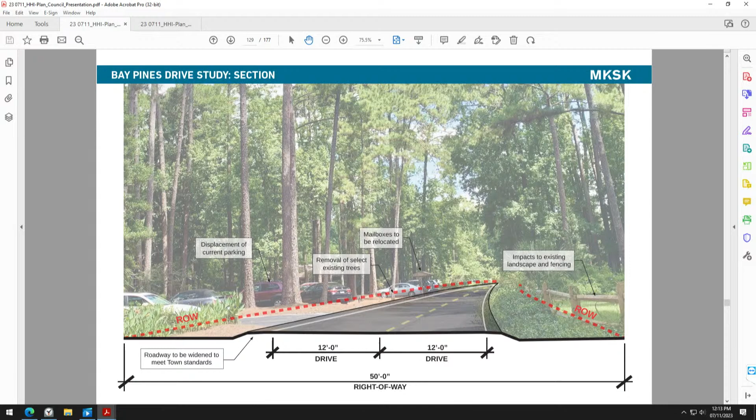So here's a view of what that connection of those two streets would mean and look like with 12-foot drive lanes, and there's some drainage, but the alignments work such that that should be a fairly easy fix. On to Sea Pines Circle, if I may. Jonathan Guy, I'm going to allow you to speak to this while I'm passing the baton.

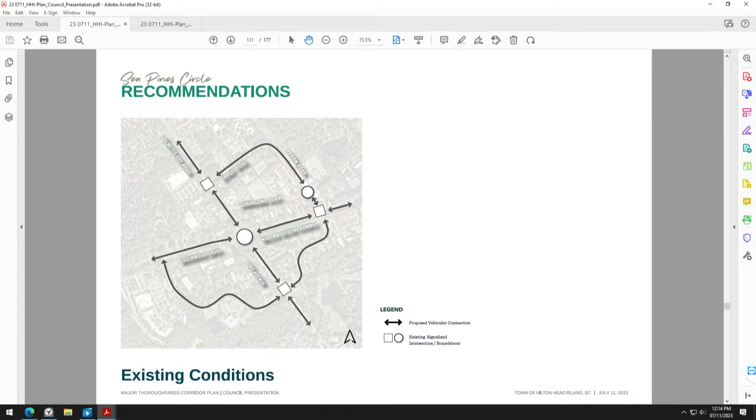These are the existing 3 of the 4 quadrants that have those bypass conditions that I think serve us well to Councilman Ames' point, that northwest connection through the island crossing center has been talked about for some time, but it continues to make a lot of sense. Does. I'm just looking at traffic right now, and the approach from Greenwood is backed up almost to Office Park Road right now. So the importance of why we're stressing this connection is to create circulation around the Sea Pines Circle so that you don't have to go through the circle. That's what you're seeing today.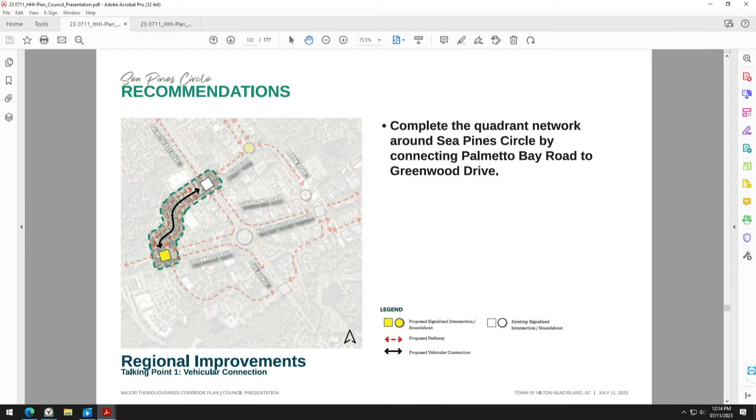The backups that are on Greenwood is because there are options. Drivers may not know those options, but creating a quadrant network around this allows us to pull traffic off. It allows us to circulate. More importantly, and we'll get into this as we dive into the details, it also gives pedestrians and bicyclists a way to navigate the circle without entering the circle. Roundabouts can be designed in a manner that is conducive for pedestrians, but when you get into the much larger circles like this, it really gets more complicated. They're not as friendly of an environment as they should be, right? So that really helps with that.

We looked at a variety of different options here at the intersection, this new connector in Greenwood. We would recommend signalizing this. We looked at a variety of options, as I said, but signalization would work the best here. It's going to give the most opportunity for drivers to understand where they're going and what they're doing as they're coming up Greenwood, exiting the Sea Pines community there. Those drivers that may not be familiar, additional signage could help direct them over to Palmetto. That would get them out of the circle or to Pope Avenue, depending on what they're doing at this location. So it makes a great transitional point for that. And it's key to making this network work long-term from both a pedestrian and a vehicular standpoint as well.

We mentioned this earlier, but putting in a roundabout at Arrow Road and Target Road, it's got some very unique geometry. Roundabouts are fantastic for that. It helps to eliminate additional right-of-way. It makes it more conducive to the volumes that are there in the direction that they're heading. And so that will be important for us to look at and implement. We're kind of stepping through how we see things beginning to lay out and the importance of those, if you will, from an implementation cycle.

Jonathan? Yes, sir. Let me go back to the northwest quadrant. Will you figure out, or will the owner of the shopping center figure out his capacity to exit from the property? My impression is today there can be 10 cars trying to get out on Palmetto Bay Road, and we don't have the quadrant connection. Correct. I'd be concerned about capacity in that location. Absolutely. Yes, sir.

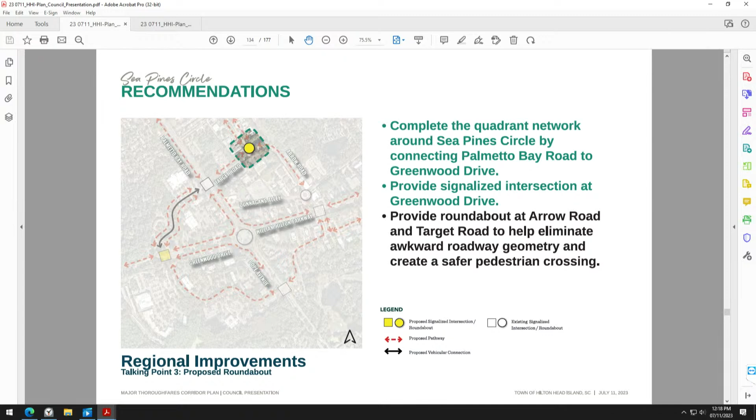So in addition, sort of the next level is, as I mentioned earlier, expanding that pedestrian pathway network, right? You can see up on the screen where we're showing the red connections. These are the movements that we want to prioritize for pedestrians. And as you notice, now you've got 360 degrees circulation around the Sea Pines Circle without ever entering into the Sea Pines Circle. This does a lot of things. It puts pedestrians and bicyclists onto streets that are more conducive for them.

The street typical sections can adjust to these and be modified further, but you're moving them to the locations where they are balanced with the vehicles that are going to be there, right? So we're not talking about the heavier volumes like on Palmetto Bay necessarily. And so this gives them the opportunity to strategically move about the roundabout without having to navigate the roundabout. Plus, it's going to help us with individuals who may want to try to cut through the middle of the roundabout because they see a giant section where there's no vehicles.

This will give them the necessary circulation, and we'll add to why we want to do that here in just a second. I think it really pulls apart the local and the regional trips and really gives you that access. It's needed. Absolutely. So how do we keep them from trying to go through the roundabout? Looking at different types of barriers to enhance that. I'm not talking about Jersey barrier necessarily. I'm talking about something that's more aesthetically pleasing than that, but deterring that path.

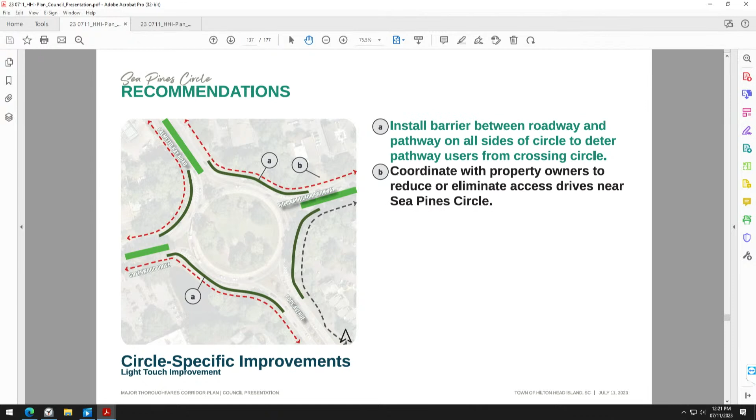Those things are going to help to make the circle work better for the interim time until we can get into something that's a little more efficient for the operations at that location. Working with those property owners, as I've mentioned, to reduce or eliminate access drives near that. Where we can provide for cross connectivity is going to help with that. Still maintaining driveways, but providing cross connectivity. Any trip that can be made outside of the major roadways and connected to those parcels is going to help you with overall efficiencies of the circle.

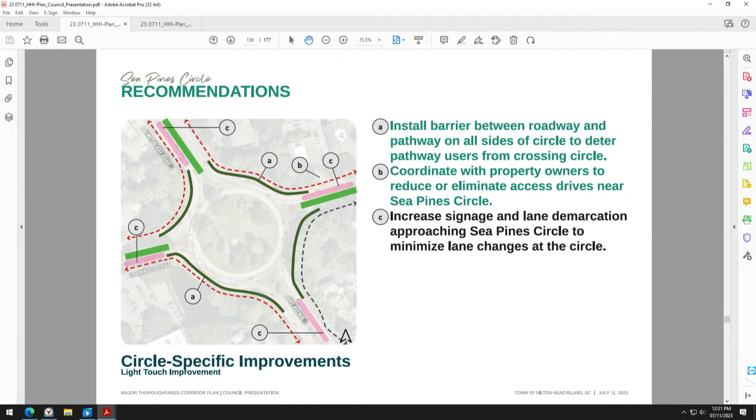And then signage, helping to understand where you're going, how you're approaching things. Again, remember your driver population. It's individuals who may visit once, twice a year, helping to remind them, utilizing your lane markings and signage. It's going to be very helpful to minimize and reduce lane changes that are occurring as they're approaching, because that's what causes a lot of congestion as you're approaching a roundabout like this.

And then again, lane channelization to minimize lane changes, right? So helping to streamline their approaches, giving them enough advance warning so that they don't get up to the roundabout and make a decision that they need to change things. That will help with that.

And I think, in fact, I know some of that's occurring today with individuals having to circulate multiple times to move through this area, which adds to that. And then close out median cuts and add in new medians. Again, landscaping, channelization, that's all going to help with that overall operational efficiency.

All that kind of leads up to what is known as a turbo roundabout. This is something that has been implemented in the United States. It's being done in locations where you need multi-lane roundabouts, but you want to avoid conflicts between weaving movements internal to the roundabout. Okay, so what this does is it channelizes the approach to that. If you're making a left, you're in a particular lane. If you're making a through movement, you're in a particular lane. If you're in a right turning movement, it's a particular lane.

So it's almost like you would approach a traffic signal where you would align with the lanes that you're going to. That eliminates the movements that you have to make once you enter into the roundabout. They're channelized, they're protected, so you don't have vehicles crossing over each other. You're all familiar with some of the multi-lane roundabouts that are not only on Island, but are in Bluffton, along Bluffton Parkway, and how some of those have to be navigated a certain way. Yes, you get used to that, but they're not as efficient. This has been tested in numerous places and is providing operational efficiency higher than what a traditional two-lane roundabout would be, or multi-lane, I should say.

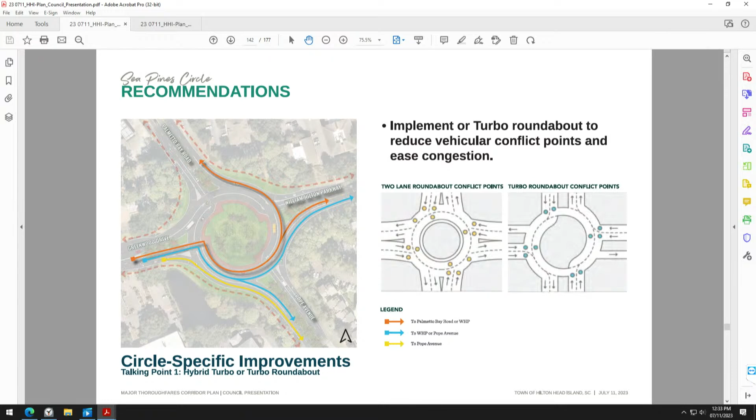I think the quadrant idea is really impactful and can really leverage those parallel connections, which are desperately needed on the island, to pull out those local trips and take another look at this circle and see what's needed. The circle is doing everything for everybody right now, so how do we begin to loosen that around the circle?

Go back to David's question earlier: is it feasible to have that pathway going through the shopping center? I think so. To Addie's point, it brings resiliency to your network, which is something you don't have a lot of. It's a good idea, and I think it's feasible, but you have to acquire that property. Sure. You're going to have to think about how that gets redesigned to accommodate those users. A lot of folks using the pathway system are probably accessing some of those businesses, so providing that access and accommodation for that mode is something to really consider.

I can see it being a lifesaver on a Friday, Saturday, Sunday. You've got guests coming in, stopping at the grocery store, taking the back road, avoiding the circle. So it allows traffic to flow down Pope Avenue easier. Not speaking for Sea Pines by any means, but it would allow their guests easier access into Sea Pines.

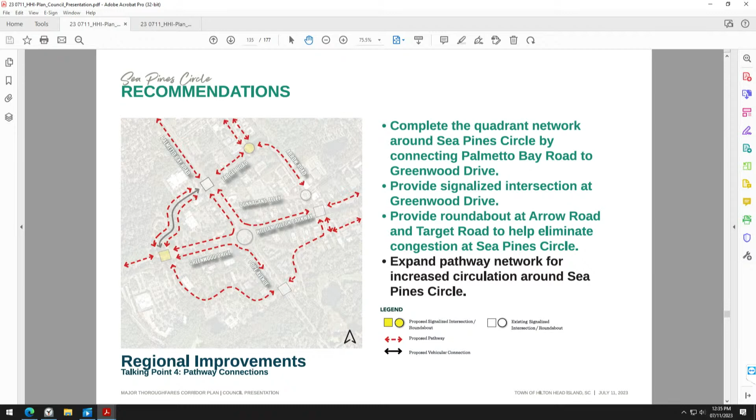I think it'd be helpful, because there's kind of a squiggly sketch here, to have a blow-up of what that would look like. Until the mayor said it goes behind Staples, I assumed it would go in front of Staples, like the pathway does now. Something like this is what it would look like, given property acquisition and agreement. Absolutely. Good. Move on.

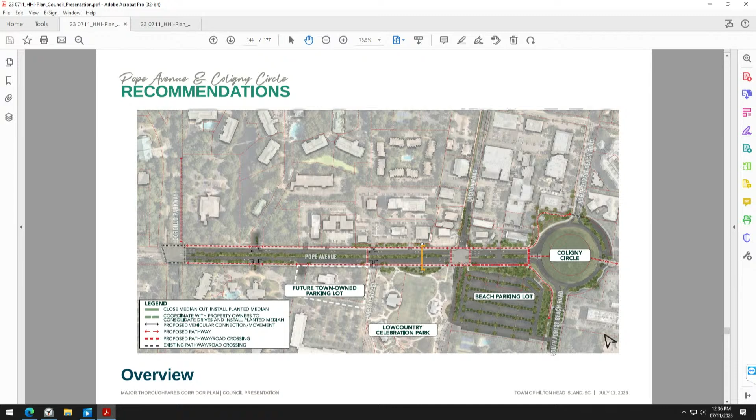Okay. Pope Avenue and Coligny Circle. Taking a serious look at Cordillo to the Circle as the most congested, maybe the most problematic, quite frankly. The segment from Cordillo west up to Sea Pines Circle is one of our most beautiful corridors because of the widened median in the southbound direction. There's more movement to the roadway. It's very attractive, large plants overhanging the road. Once you get to the east side of Cordillo, there are lots of curb cuts and conflict points, but we've got real recommendations for making this more civilized.

Just as we talked about the mid-island segment of the parkway, this too has a whole different character from what we're used to seeing on the island. This is highly populated, high activity, lots of retailers, food and bev, beach parking, beach access. So it is more of an urban condition than the parkway condition we have elsewhere, from my philosophical standpoint.

So first off, widening and providing on both sides of the street a 16-foot wide path. I'll let Addie speak to that. It's for bicyclists and pedestrians, separated from the automobiles. We've got a section of that, and Addie can speak to that in a second.

Secondly, at the two major signalized intersections, at Lagoon on the right and Cordillo on the left, those remain signalized, but with a raised pedestrian table. So the vehicular way raises to the sidewalk, dare I say, elevation, to intentionally tell the motorists, not like a speed bump through a retail center, but it tells the motorist, this is a place to slow down. This is pedestrian and bike intensive.

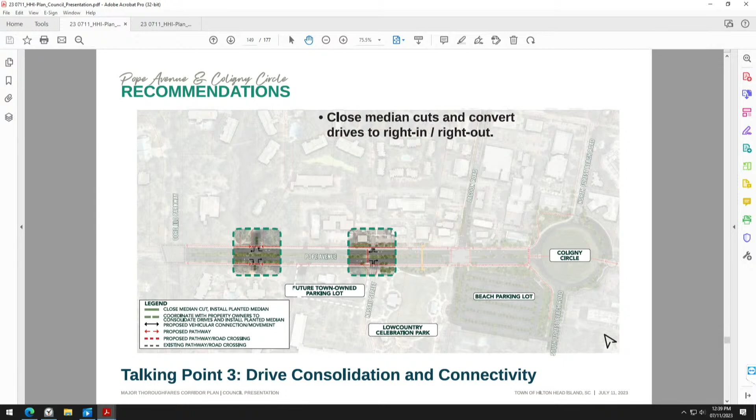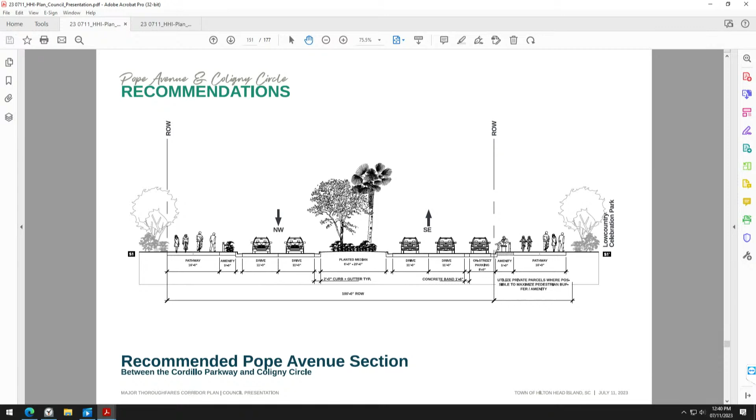So there's the reduction of median cuts and more right in, right out. Taken all together, this is, again, more of an urban street, and it accommodates all modes of travel. You can see the outboard 16-foot wide pathways. There's an amenity zone. We've provided for on-street parking adjacent to Lowcountry Celebration. In perspective, again, Lowcountry is on the left. The beach is behind this viewer.

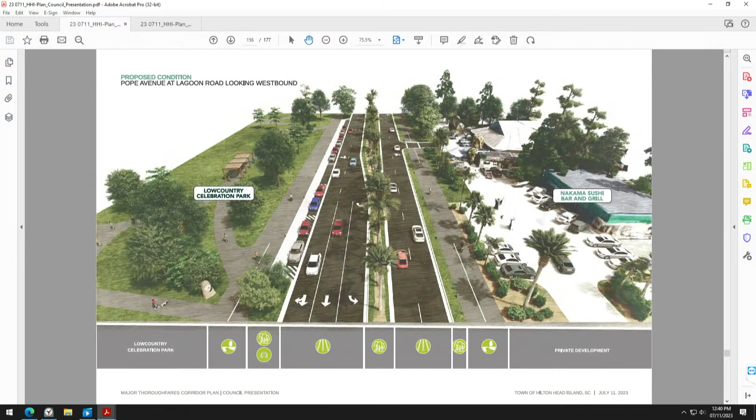Provide for safe crossings at the curb cuts that remain and are needed. Enhance the plantings in the median and propose expansion of it. Install an amenity zone next to what would be on-street parking. A 16-foot wide pathway system on either side. That is a view hovering over the Lagoon Road intersection, looking towards Sea Pines Circle. What is an amenity zone?

Benches, trash receptacles, separation from moving vehicles, i.e. bicycles and parked automobiles. Somebody opens the door, they're not taking out a bicycle or pedestrian. Thank you. But it's all the stuff we need to provide for. Light fixtures, signs, trash receptacles, all the stuff that's on the street.

Yeah. Brian, I'm somewhat having a hard time with the walkway that's coming through the circle. I'm assuming that would mean that we would have to have stoppage in the circle for the pedestrians to cross. That's right. Coligny area being somewhat of a cul-de-sac, I see it similar to the quadrant conversation we were having at Sea Pines Circle, where there's not a lot of alternatives to enhance the movements that have to happen at the circle. I'm just curious how that works, and there's a stacking problem as it is.

Well, there's crossings from one side of Pope to the other, from beach parking to Coligny Plaza presently in that area. We already have crossings of North and South Forest Beach, one of which is a HAWK crossing. Relatively speaking, and Jay Guy can speak to this, our traffic volumes around this circle are fairly modest. We've got obviously a lot of beach travelers and a lot of folks that are coming from the beach and going to Coligny Plaza to the food and bev.

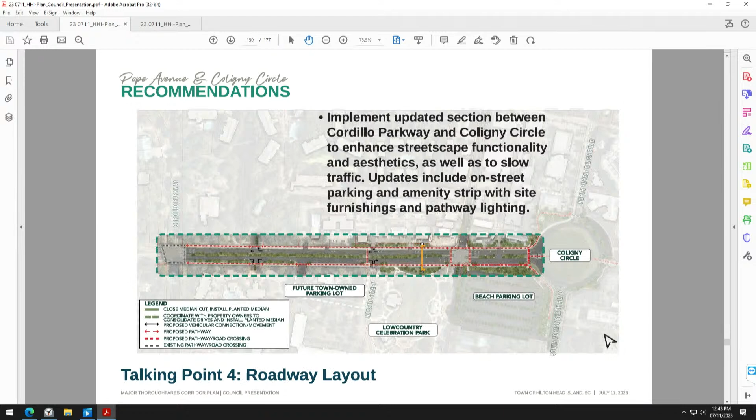Can we back up to Lagoon? That crossing has bothered me ever since it was constructed. There's no safe pedestrian refuge going across there. It needs to be an all-stop with no right turns in my view. And I've been begging for something to happen differently about that. It's a horrible crossing for pedestrians and bicyclists, and we have a lot of folks crossing there.

Yeah, Lagoon, right there across from Low Country Celebration parking area. So when you have folks emptying out of the beach parking and Low Country Celebration parking, they're turning left while the signal is telling pedestrians and bicyclists to cross there. And you've got right turns coming off of Lagoon at the same time. So you may as well not cross there. There's opportunities there to explore doing pedestrian scrambles.

And I think having that raised crossing really helps elevate. This is a space, as Brian said earlier, that's more urban, if you will. The priority needs to be to the person on the bike or the pedestrian. Creating a scramble, specifically as we've narrowed down the cross section a little bit, really gives the priority, and the second is the vehicle. So I think that is an option to explore, and it would be a great opportunity for that.

Yeah, Mayor, I think this is where we need something right away. I'd get on my knees and beg if I could. I would do it right now if that would help. So if I'm not mistaken, and Mark, please correct me, that intersection has already been identified by DOT as a problem, and there are some conversations taking place on that. So look for something there, rather than beg.

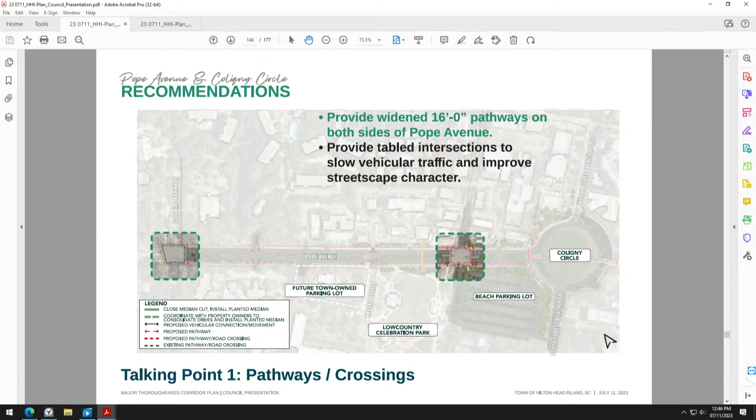And there will be a combination of efforts here, right? The adaptive traffic signal is going to this location, as well as the bike and ped detection, potentially the raised tables here, and the changing character that's being proposed. If we go to this last slide, Brian, this has more traffic calming, more of a complete street opportunity. It makes wider pathway sections to accommodate more users, and the proposed crossings try to reduce the volume at that one existing location. So I think we'll see benefits from these items.

John, if you could, since it's been mentioned several times, just provide a quick update on the traffic lights integration. Yes, sir. I've finalized the installation of the infrastructure. The last 2 weeks of July are when they'll be turning the system on and off to test, and the system should go completely live in early to mid-August. Turning it on and off allows us to calibrate and understand the operational conditions. We anticipate everything will be operational by mid to late August.

Okay, great. I think this is absolutely phenomenal, and we've had 3 hours. We're going to get to public comment in a minute, but what a great presentation and a lot of information for us to digest.